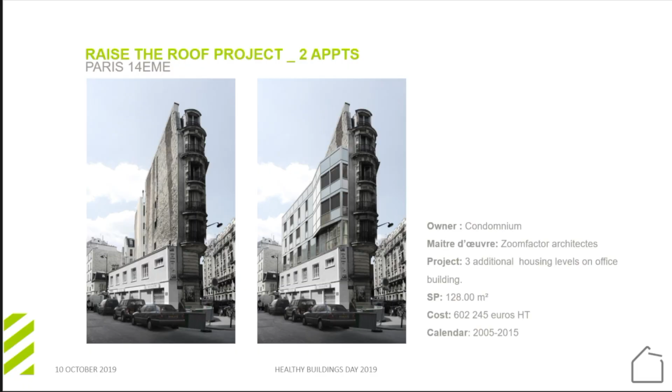This is the reason why we created UpFactor, by bringing together in a single entity architectural and technical expertise, but also digital technology. Quickly, we had the intuition that this would work.

Quickly, we had the intuition that we have to address this market of upward elevation by the mass. We have to be able to develop a software that would allow us to do automatic feasibility studies.

Called UpFactor GeoServices. Oh. No. Perhaps. No.

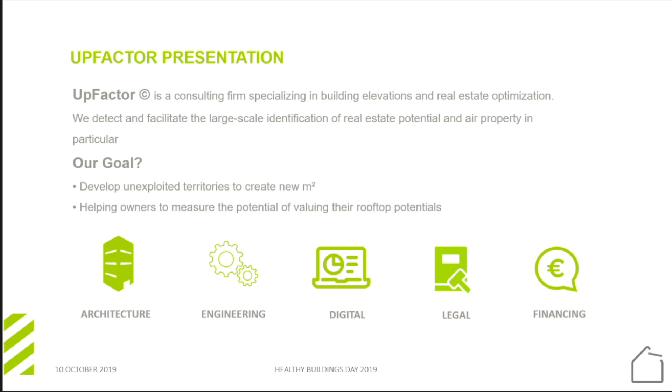Our software developed in-house is a geographic information system.

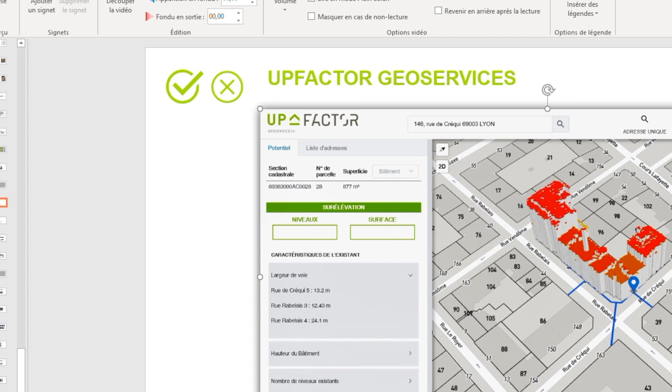Once the potential has been identified, this approach is supplemented by more conventional studies, with the result found or compared with the reality of instructors of building permits of the cities.

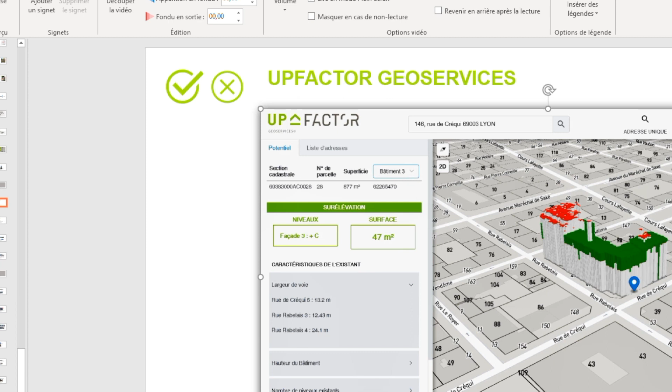We also insist on the fact that we have integrated in-house engineering, structural expertise, and in-depth studies, such as defining building permits and, as possible, the construction, dimension, and load recovery.

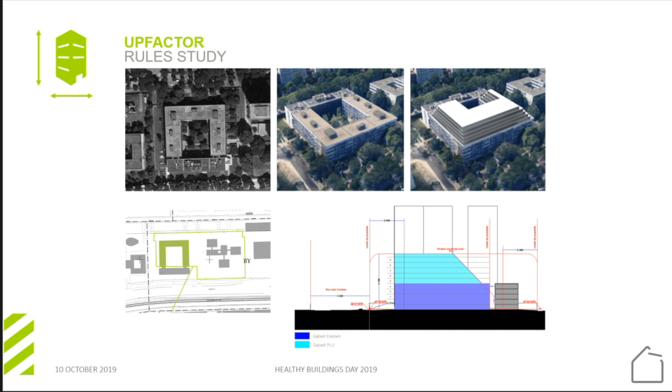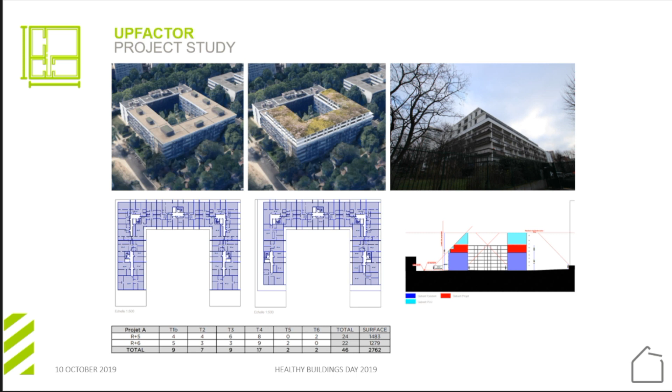Sometimes, like in this case, we must limit the increase to 2 levels, when 5 could be permissible. Why? Because what's important for UpFactor is reconciling the project with maintaining the building in operation, and it's very important to apply this kind of project in upward elevation.

Who are our targets? Our targets are primarily the social landlord, who are the first interested in this approach. In particular, we analyzed the assets of a company called CDC Habitat in Paris, a subsidiary of the Caisse des Dépôts et Consignations.

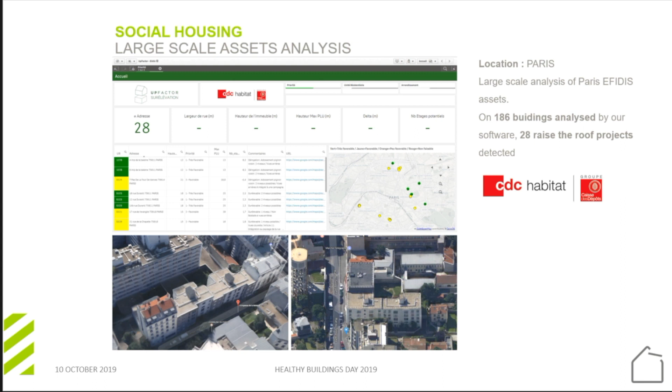For one of these entities called EFIDIS, we analyzed with our software 186 buildings in a few minutes, and we detected 28 raise-the-roof project buildings immediately. It's incredible, but it's true. By this, we offer two gifts to this social landlord: new housing without buying land, and adapting the existing building to today's life.

For now, for example, this is 63 new apartments. And for sure, it's at the moment where they plan a renovation for this building, so it's the good moment to have this approach.

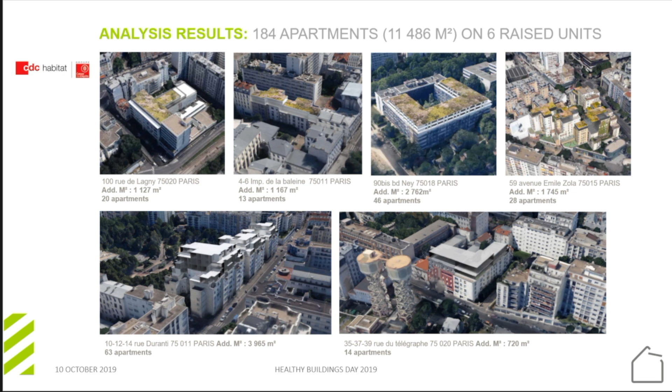Now we're able to detect for CDC Habitat 6 priority operations that generate over 11,500 square meters potentially to be raised in Paris. It's a real opportunity for social landlords that will, in the coming years, lead to the virtuous rereading of the existing patrimony. This approach also interests large-scale real estate companies, like the particularly large insurance company Covea here in Paris.

They entrust us with a part of their assets in Paris, and we detect a project like this, where we find 352 square meters. It's only 4 new apartments, but for real estate value of just over 4 million. So for a lower investment cost, about 60%, it's surely a real good operation for real estate valuation. It enables also creation of housing and bringing additive income to the property.

But finally, the topic I think is of interest is that Raise the Roof could have a real impact on the world of condominiums, particularly on the financing of energy retrofits. In fact, we applied the same method of large-scale analysis via our software to the asset management of co-ownership trusts. For example, with Régie Franchet near Lyon, we detected out of 193 buildings under management, 36 eligible for rising.

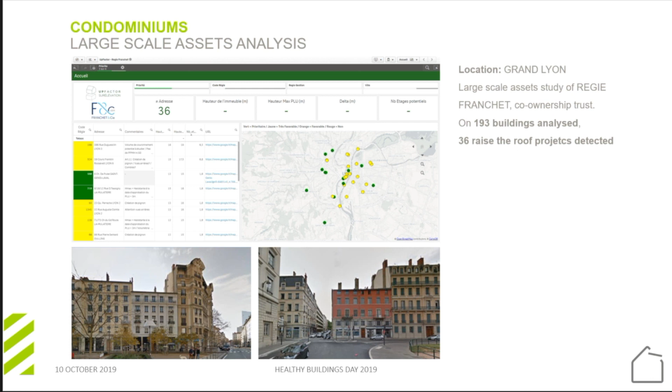As an expressive example of what could be done, we have the project located Cours Albert Thomas in the 3rd district of Lyon, where we found a little more than 850 square meters in elevation and densification. The co-owner and us will put in competition developers, both the building permits purged, but also the right and the agreement of the co-owner to carry out the project.

In this process, the co-owner will recover just over 650,000 euros, and with this they will be able to finance their energy renovation. That is to say, the facade and insulation, the renovation of all the joineries, the replacement of the ventilation, for a little more than 450,000 euros of works. So that is a profitable operation for us, and it could be massively expanded nowadays.

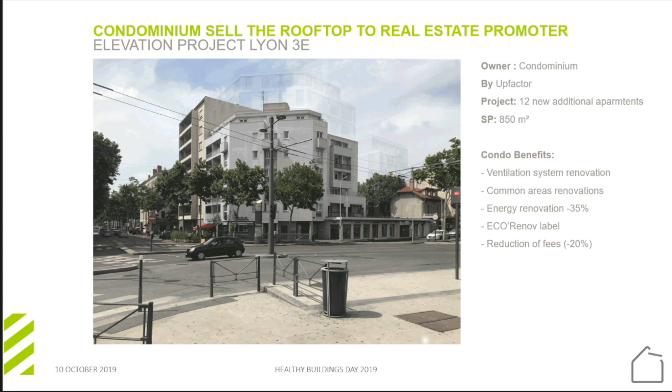We have 8 similar projects in condominiums right now, both in Paris and in the French regions, and we've realized that this can be a real lever for co-owners to finance energy renovation.

So, building offsite, we talk about it with mod pods. We work very closely with the professional sector and the technical center in France now, of the building, to integrate offsite construction. Our aim is generating the process of rising by limiting the nuisance of housing, especially on the people who live in this building. For us, it's a very important thing.

So therefore we'll be able to realize as many projects as possible. We were interested by the experience of these people. It's a video of La Casa por el Tejado, a firm in Barcelona which has managed to put in place quite a similar process. They have developed a modular construction.

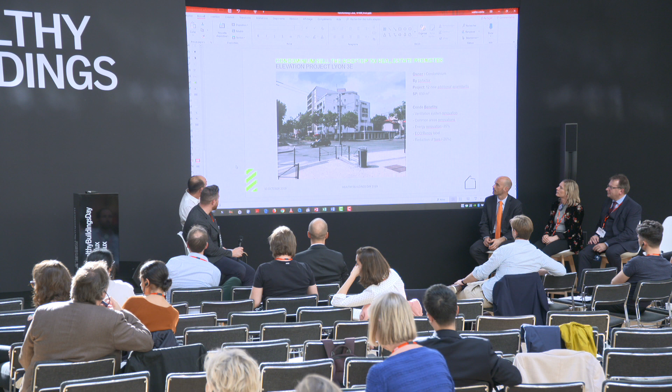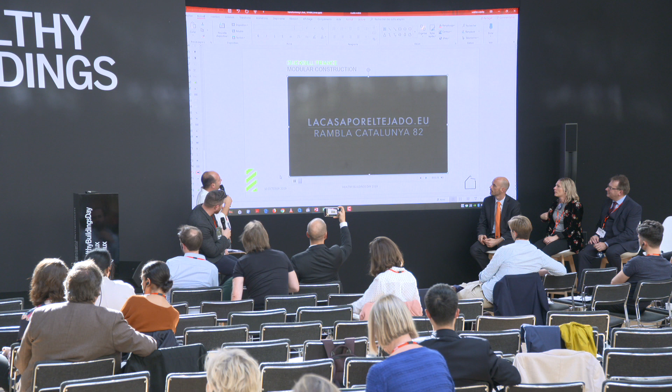It's a modular construction approach to address the market of upward elevation. They work with a 3-dimensional steel base, with solid wood floor plan or precast concrete, steel frame, with wood floor plan or precast concrete, wood wall or steel composites.

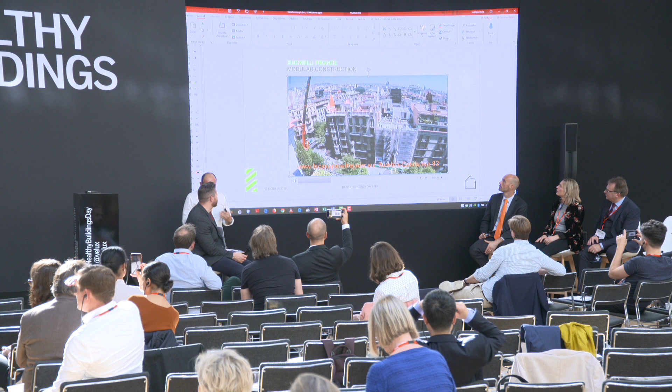They were able to build a 450 square meter extension in only 2 days. This approach is interesting because it enables us to build a raise-the-roof project of less than 500 square meters in little more than 3 months. Manufacturing in the workshop takes 8 to 12 weeks, and after 2 days of installation and about 1 month and a half of finishing on site. So it's a real demonstration of what the construction method helps us do for managing this kind of market of upward elevation.

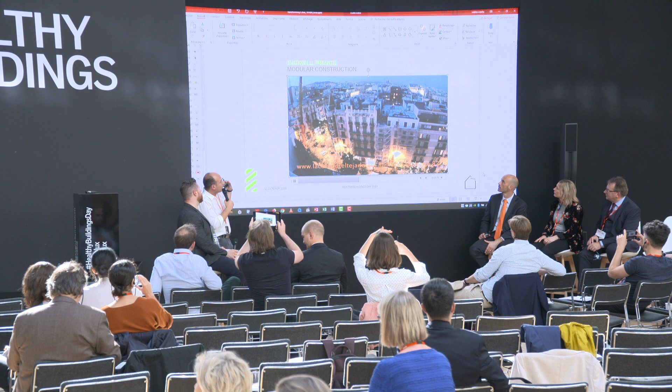After expressing this, we work with them on projects like this in Paris too.

So right now we work with professional lines too, in order to develop prototypes with several companies, both in wood or in frame of every material. We are really looking forward to this accomplishment in order to prove how this brings the process that Upfactor is engaged in.

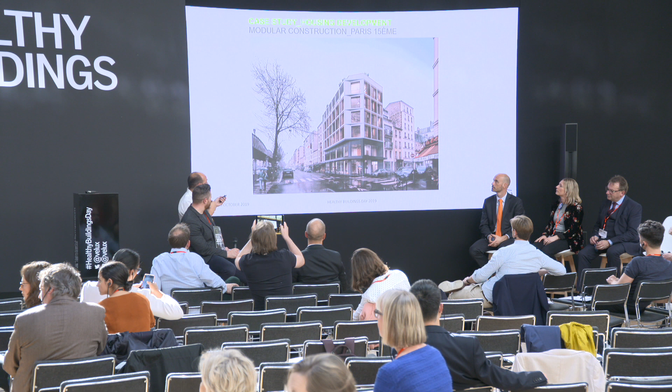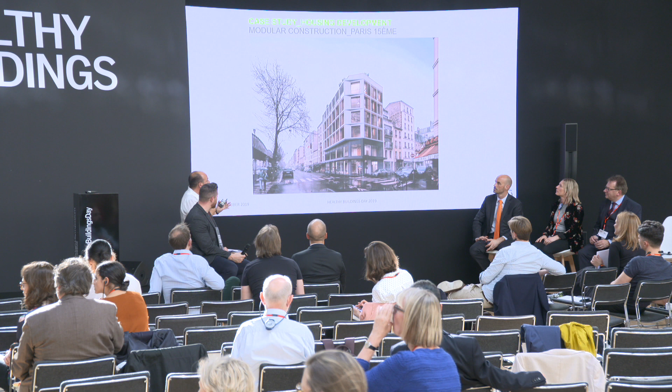Here it's a project of social housing in Paris, with 27 modular units. In this project, the 27 modules were installed in only three days. It was incredible, and I'm sure it's the future of projects for upward elevation.

So Upfactor is a hybrid company that uses the process and analyzes massively the addresses to facilitate the increase of social housing markets. We plan to work, of course, in Paris and the greater Paris region too, but also I think some European towns, like German towns or UK towns, could be interested by this kind of project too.

We also work with an approach of research and development. We recently participated in calls from ADEME and the French government on what could be the valorization of the roof depending on its use. Our aim is first creating housing or activities, a new type of office. We also work on the implementation of energy production sources, and we like the idea of developing biodiversity areas too, because when you can build, you can plant. So it must be a very good thing for us.

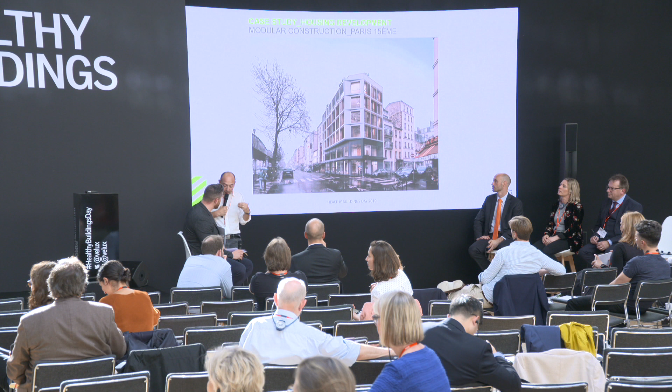Our idea is to create a compensation in urbanization, so it's very important for Upfactor to develop this kind of way. Upfactor aims to answer this question: how urban space, airspace, can be given the best value. It's not only for money, but also for well-being. So that's what we are working on.